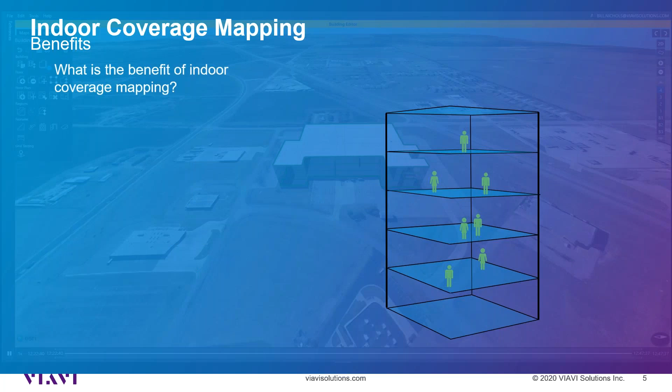So what are the benefits of indoor signal mapping? Today we've got many DAS or distributed antenna systems being installed. Indoor signal mapping can help with verification of coverage. In the old days, you basically would go to a particular point on a floor called a waypoint, stop and make a measurement with a spectrum analyzer, looking at the power level at the location, and maybe have a radio to do a subjective audio quality measurement.

This type of mapping took quite a while, and then when you were finished, you had to produce the results generally using an Excel spreadsheet. Processing this information took quite a bit of time. You're going to see today that you can quickly set up the map, quickly configure the maps, add floor plans to the building, and then do a walkthrough, all in a very short period of time.

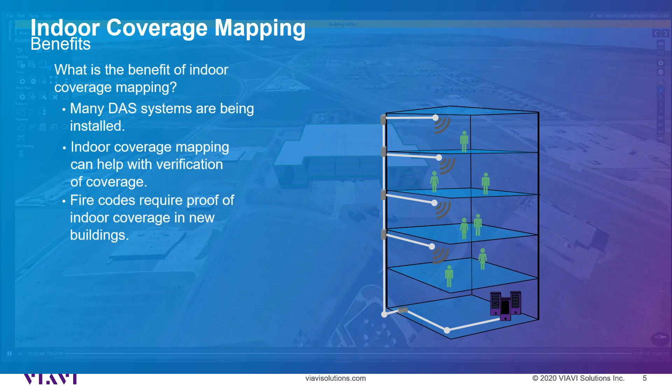The other driving forces behind indoor signal mapping today are fire codes. The fire codes today in the US require coverage in new buildings, and if you're working under the international fire code, that's new buildings and existing buildings.

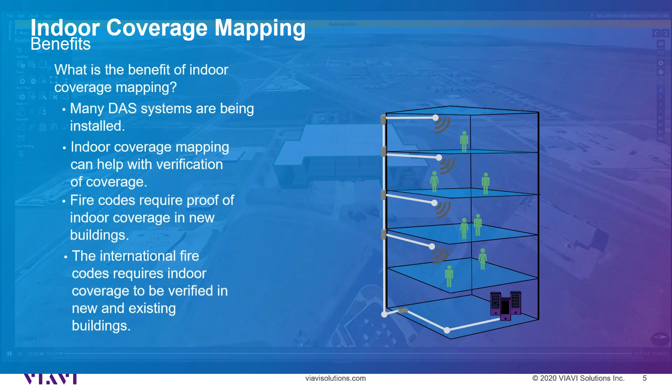Okay, so some of the benefits to the indoor signal mapping: it integrates the Neon capability to automatically collect geo-referenced test data with the 3550 or 8800 SX, and it saves valuable time and money.

By automatically calculating the indoor location and correlating with the radio signal data, it limits the need for manual check-ins. By removing data recording errors caused by incorrect location estimates in complex buildings through automatic indoor path determination, this is all built into the Neon signal tracker.

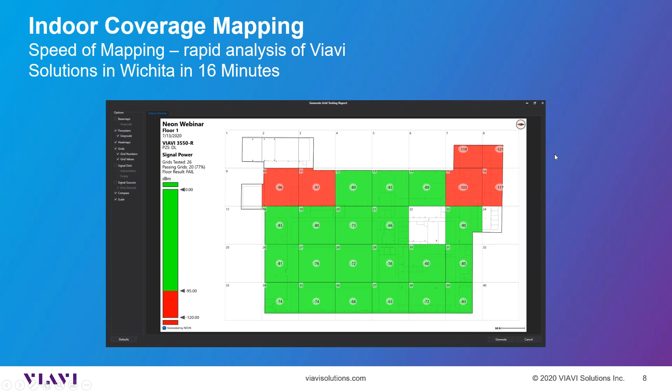This building is approximately 280,000 square feet on the floor here, and it took about 16 to 20 minutes to do this walkthrough. The device that you see here is the Neon signal tracker. This is worn on your belt.

You want to point it perfectly forward to get the best results, so it doesn't keep trying to get you going sideways. You get that straight forward, and you can get a real straight line on your points as you do the walkthrough. This device supports collection and processing of sensor data to deliver that 3D indoor location.

The Neon tracking unit includes the temperature compensated triaxial gyroscope. That's your X, Y, and Z axis so that you know which way you're going. It has a triaxial accelerometer to count your steps. Has a magnetic sensor so that it knows where the magnetic north is.

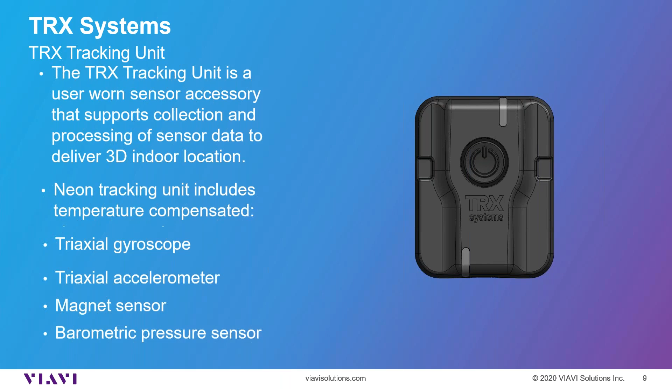The Neon Command application runs on the Windows computer. This allows you to create your building before you do your mapping. We're going to actually run through this process to show you how easy it is to set up. And then once you've walked the building, you can upload to the cloud, or you can save it locally on the Android and then port it over to your PC.

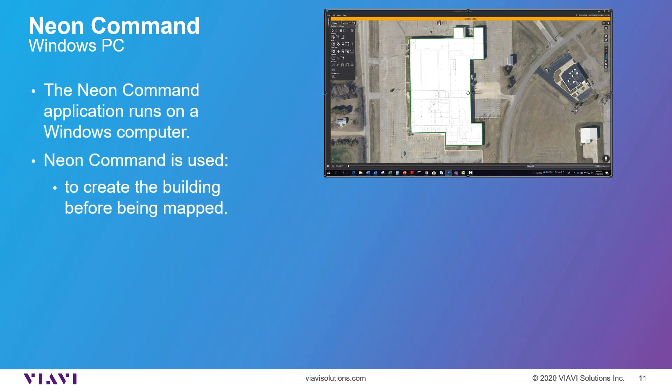So this is just a before and after. You're going to see this here in just a moment or two, setting up the map, and then this is just an example of the end results here. This is both on the Neon Command, which resides on your PC.

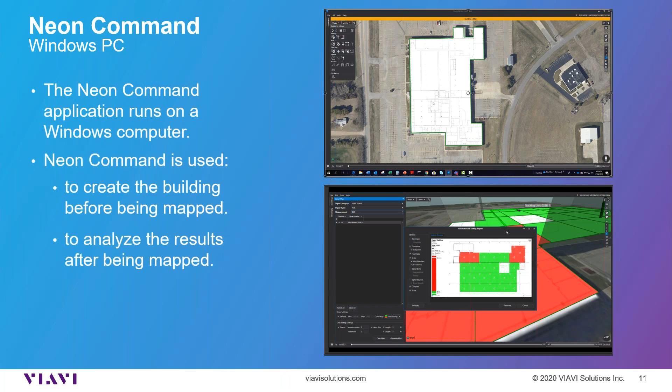Okay, so we're going to kind of go through the process here real quick. In real time, it probably took me about 15 minutes to do this. So it really doesn't take very much time at all. They have some really nice tools in here to expedite the process.

So to get started, the only thing you have to do is go up to the search icon and either type your address in, or if you have an address that you've already worked with and you want to maybe do another map of it, you can go down and select it from the list.

Now, once it's located your building, you're going to see it on your PC, and then you'll want to use your mouse. You can use your thumb wheel to kind of zoom in and out, and then you can also use the left click to grab it and move it around the screen so you can kind of center it up.

And once you've got it centered on the screen where you like it, you'll hit the file icon up at the top, or the drop down, and you'll select create building. And what that gives you the ability to do is draw an outline on your building. So you just start at a single point and you just walk around the building with your mouse and just make an outline of that building.

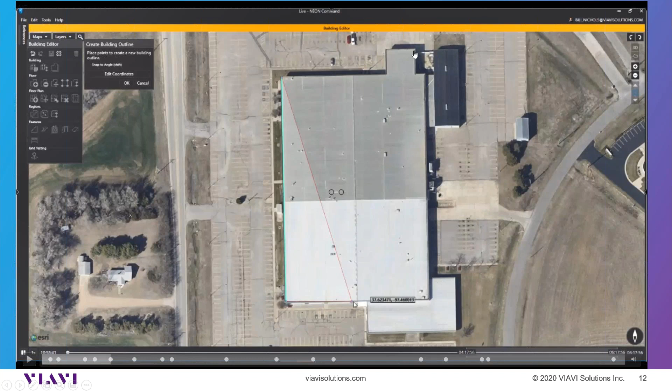Then once you've made the outline, it's going to pop up a window and give you the ability to name that building. And that's where you can start to add your floors. In this example, because I wanted to show you how this is done in the Neon command, I'm actually going to add 4 floors above and 3 floors below so I can show you some of the features in here.

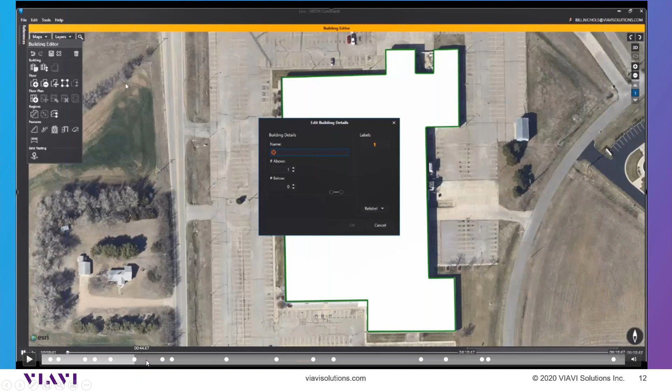Once you've done that, the only thing you have to do at that point is go over to your icons and select the floor plan to add the floor plan. And you'll locate that on your PC wherever it might be. They can be JPGs or PNGs or bitmaps. And you'll just open that up.

And it will somewhat self-center on the building, but you can see that I've got a little bit of work to do to get this lined up with my outline. And there's a real neat tool to do that too. You can edit this with points. So you go over to your icon and you select edit floor plan with control points, and it'll pop this window up here.

And basically you just set these pins. You have 5 locations, so you just set these pins at each location. So you go around and set 5 separate locations on the building as we move through here. And then once you've done that and you press OK, you're going to see that it's very close to that outline.

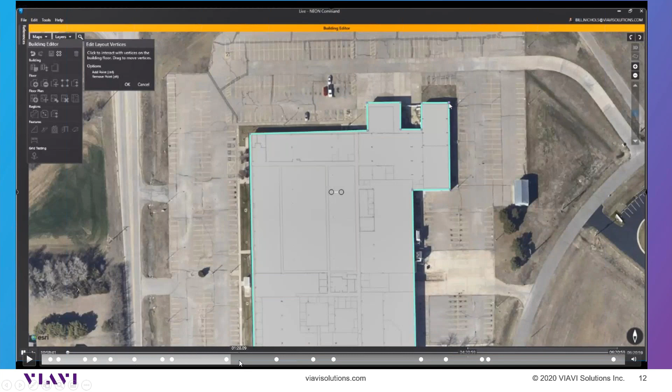And once you've done all that, it's going to ask you, do you want that as your outline for the rest of your floors? In a cookie cutter situation like we have here, that's fine. But it also has the ability, if you have a building that has a greater area on your upper floors, maybe some balconies, to add areas and subtract areas from your various floors. But in this particular application, we've got a nice cookie cutter type of building here.

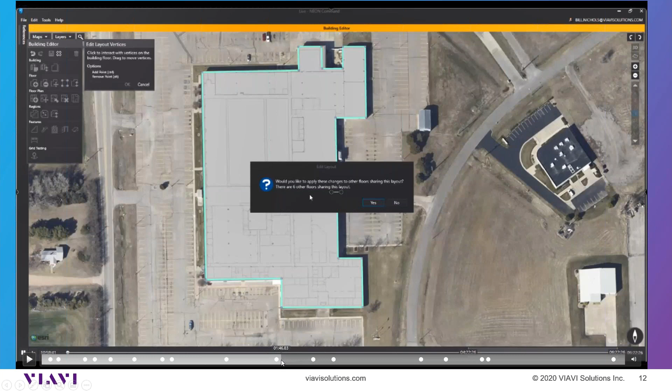Okay, so once you do that, you're just going to go through the process again, depending on however many floors you've got. You'll just go through and add those points, and it'll size that map into the outline of the building. So it goes very quickly this way.

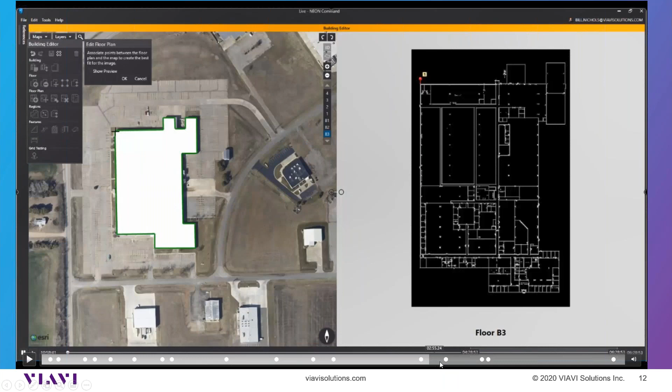Now, I'm getting to the last floor here. You don't have to use a white background if you don't want to, and you can also manipulate the colors in the grids or heat maps. You don't have to do grids either. You can do heat maps and various types of map representation. But on my last floor here, I decided to use a negative for that floor plan, and so again I'm using the edit points to put that in the building.

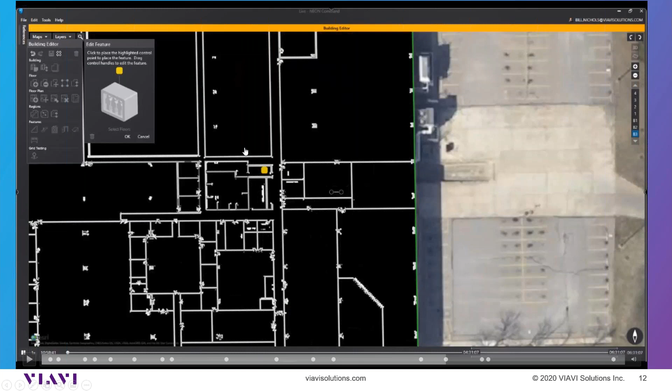And after you've done that, if you've got a tall building, you're going to have elevators, you're going to have stairwells. Like we said earlier, that's a difficult place to map. And so you can add stairwells, staircases, elevators, doorways, ramps. There's many things that you can put into the building. So you'll decide what you want to do and locate those elevators or stairwells.

And then when you're putting the elevators in, you'll tell it which floors you want those elevators to go to. In this example, I've got one elevator that's going from the first floor down into the basement levels, and I have another elevator that's going from the first floor up.

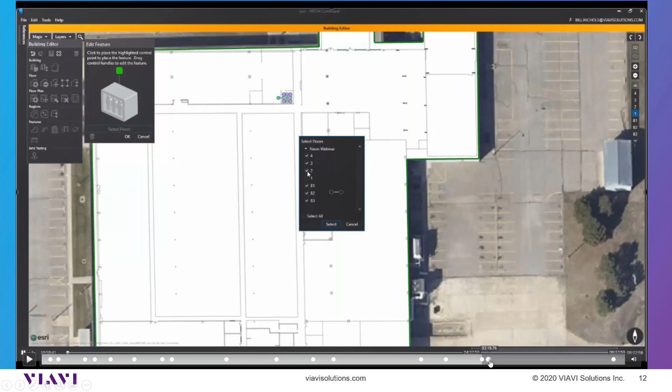Once you've done all that, you can go into three-dimensional mode here. Your legend on the right side will give you the ability to do that. Initially it'll say 3D up here, and you'll tap on that up here in the upper right. It'll put it into a 3D look on the map. And then you can actually go through and check each floor to make sure that they're symmetrical, and that's the way that you want them to look.

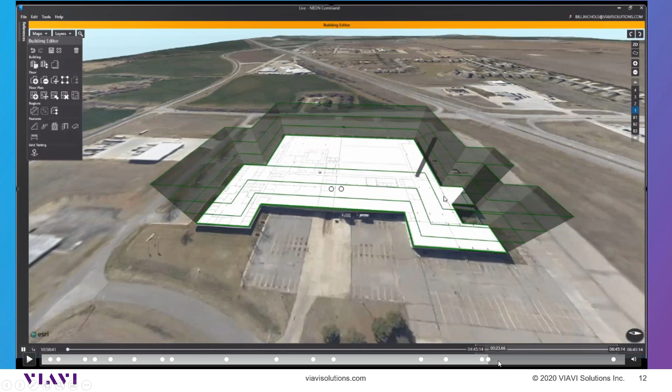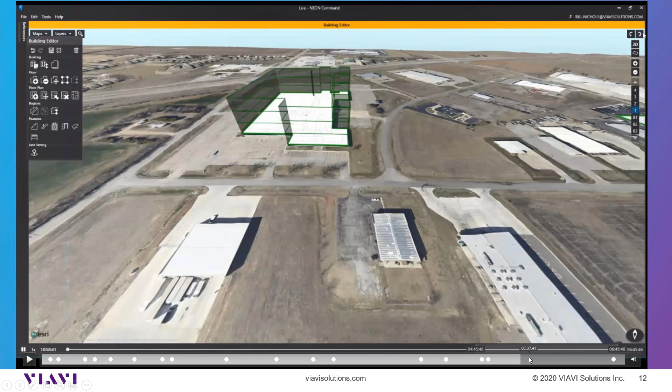And you can also do a 360 with the icons up here at the top. And again, you'll push and pull with your mouse to keep things centered up. But they've made this a really easy tool to use. So we're looking around. It looks like we like the way our building looks. And once you do that, you can go back into 2 dimensions and then go ahead and save your map.

Now, when it saves, if you are on the network and you want to do it this way, you'll hit save and it'll upload it to the cloud. And then you can just get on your Android on the Signal Mapper, and you can just download this map to your Neon Signal Mapper, so you can do your walkthrough.

Now, if you're government folks, a lot of times you are not able to use the cloud. So you certainly can store this on an SD card. And then once you get that on the SD card, then you can just load it into your Android, and you can do it that way. And there's no files on the network at that point.

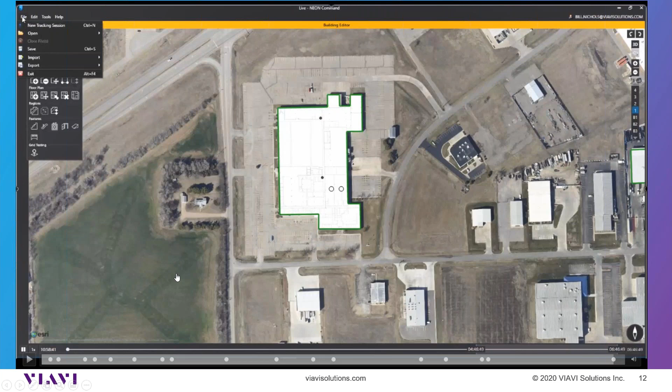Okay, we're going to talk a little bit about the Android device on here. So the Neon Signal Mapper application runs on the Android device, and you have to supply the tablet. The mapper is used to guide the user while collecting your signal data. So you'll see that floor plan the way that we've laid it out. You're going to actually see your location on that floor plan. You'll see the cursor walking through the building as you move through,

and you'll see the updates continuously on the map, so that you'll know whether you have good coverage or bad coverage, and whether you need to recalibrate your walk, which is real easy to do. We'll see that here in just a second. We'll talk about that a little bit further.

So this is basically your setup as you walk through. You'll have your 3550 connected to that TP link with the Ethernet. We're not showing the USB, but you do want to hook that USB up to power the TP link. And you'll be wearing the puck, if you will, on your belt. And then, of course, you'll be walking with your Android with the signal mapper on it as you walk through the building.

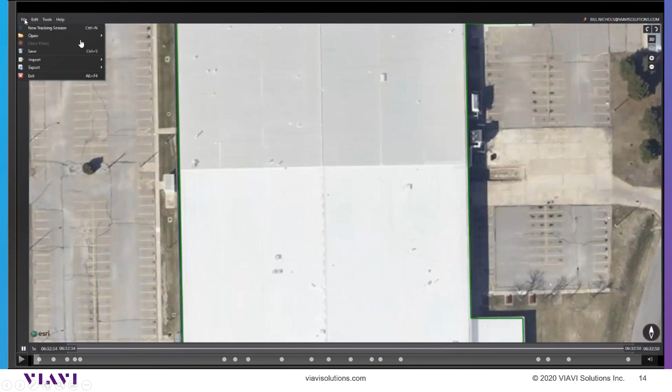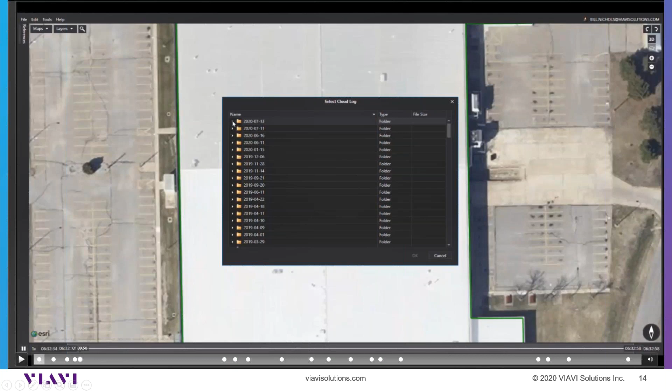And once you do that, you're either going to go to the cloud to open this. So you're going to hit open, and I did this through the cloud, so this is the way it's going to look here. It'll open up all the folders that you've got, in this case in the cloud, otherwise you'd load it off your PC. But this is the particular one I did. You open the folder and you'll find the file in there. And once you've clicked on that,

then you'll get this legend on the left side over here. I know that it's a little fuzzy to see the verbiage in here, but this is actually my map. And so the only thing you have to do at that point is decide, do you want the display showing you signal power, signal quality, BER, mod fidelity, and then once you've decided what you want to plot, there's a little check mark here by the DL, which means downlink.

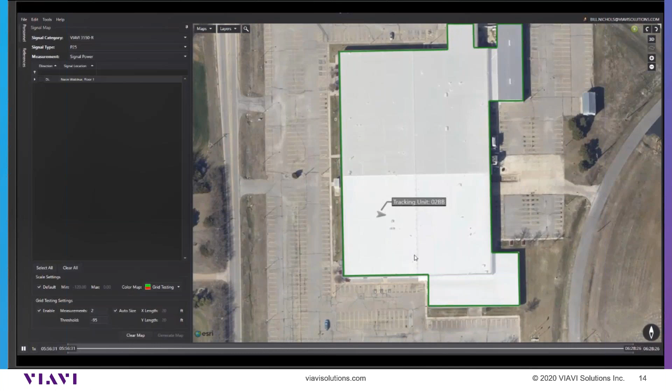And then once you've done that, you'll just hit generate map down here at the bottom, and it will populate your generated map from your Neon Signal Tracker into the display that we see here. So that's what it looks like. So this was the particular walk that I did.

Now, there's a lot of different things you can do once you get in here. There's actually a timeline on here, so you can move the timeline and you'll see your walkthrough, or you can go in reverse. You can also zoom in very close to take a closer look at things. And you can also make some adjustments if there's points in the path you want to straighten out so that you get a nice presentation for the customer. You can go in there and make some minimum adjustments to your path.

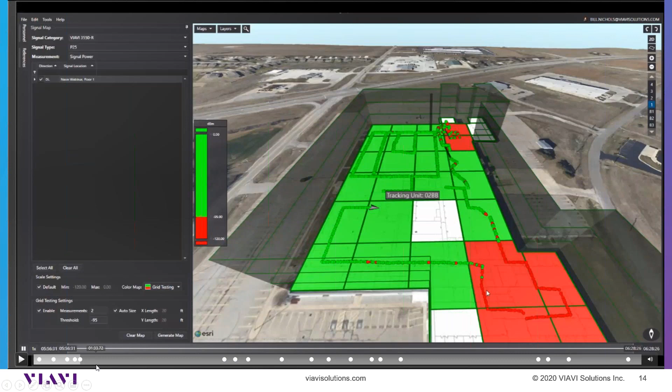So this is just showing the walkthrough here. And of course, I'm zoomed in pretty good. So any location where you're out of spec when you're doing the grid mapping, those grids are going to turn red. Now, if you were doing a heat map, then you would just see a heat generated signal around the path that you're walking. But for fire code, this is what they want to see of these indications in the grid.

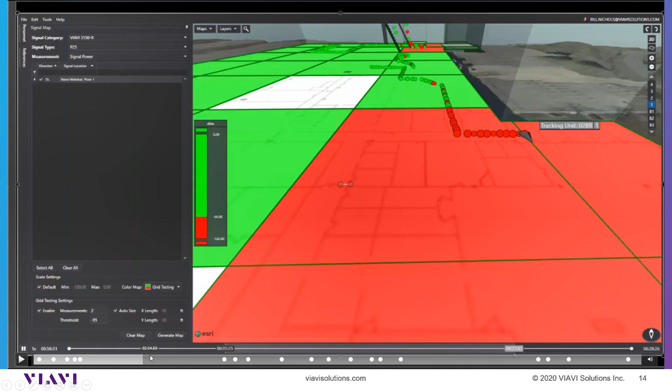And this is what a grid would look like. This particular one here is floor 1, and we're just showing signal power here. And remember, our fire code is -95, so we're a little bit out of spec over here, but out of spec is out of spec, so these grids will turn red. And in this indication here, like I said before, we've got 40 grids showing up on our screen, and I believe these are 80 by 80 squares.

So that's what a signal map would look like. And then inside of here, in this particular one, like I said, you're looking at power, and it's also telling you what grid numbers we have out here. And if a grid didn't get mapped, then there won't be any indication there, or it might be gray. I was on the catwalk on the 2nd floor here, and there was one grid that was gray. It wasn't good or bad or indifferent. There just wasn't enough information to color that grid.

And what you're looking for is areas where you have bad coverage, and you might need to put a BDA in. And we're going to see that we can go into any of these balloons here, if you will, and we can see the actual measurements at that point.

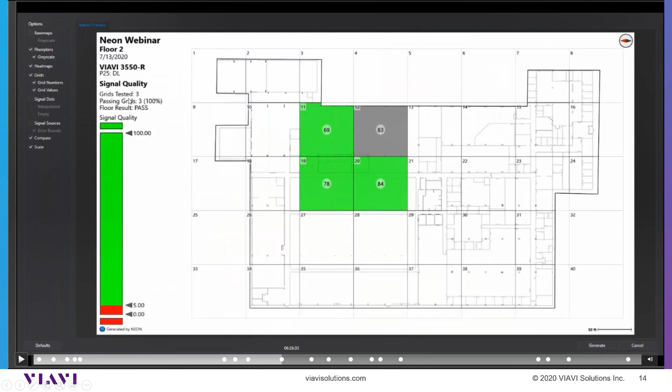And here's another grid with mod fidelity, and we're going to explain what mod fidelity is towards the end of our discussion. But the P25 standard is mod fidelity has to be less than 5%. Again, I'm going to explain what that is in a little bit. But you can see that we had a really good modulation fidelity in all of our grids down here, and even in our 2 grids that were below -95, we still had that, which is out of spec, but is still indicating that we had good audio quality.

And then over here, we're gonna zoom in on this area a little bit and see what actual signal levels we do have out here. And they were below -100 up in this area, so we do see that our mod fidelity is definitely getting a lot higher out here.

Now, here is the transmit BER. This is another one of our measurements that we make here. When you have a good signal strength and good audio quality, that bit error is going to be 0. If the bit error starts to go up, then you know that your audio quality is probably going to be impaired. Once you get above 50 or 60, you're going to start getting dropouts.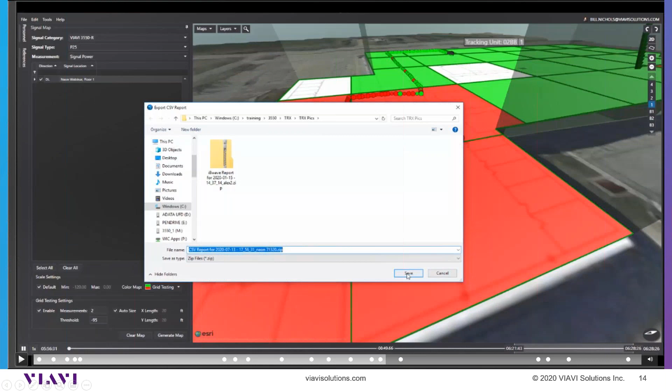Now, you don't only get the grids. You can have all the data information too, if you need to put your information into an iBwave report, or you just want the raw CSV data. Let's see if I can pull that up so you can see it. There we go. So when you do an export, all those grids that you saw, I was hitting export and going to grid report, and then telling it what type of grid I wanted, whether it was signal power, mod fidelity, or whatever.

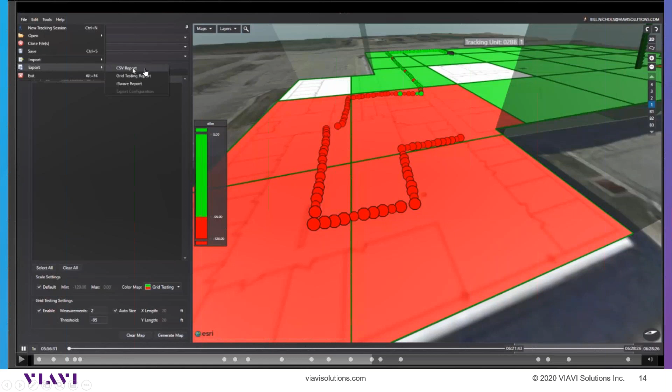But you can also export the CSV reports for Excel. That's all the raw data. And it'll also export as an iBwave report. So if you're working with iBwave, you can certainly incorporate these files into iBwave.

So this is getting the bird's eye view. Of course we saw these grids, but now we're getting a bird's eye view of what's going on. So we definitely need to do something in this corner over here, and we need to get a BDA in these two red locations, at least on this particular floor. Of course, you're going to have to do this on all the floors, but our example here is the first floor.

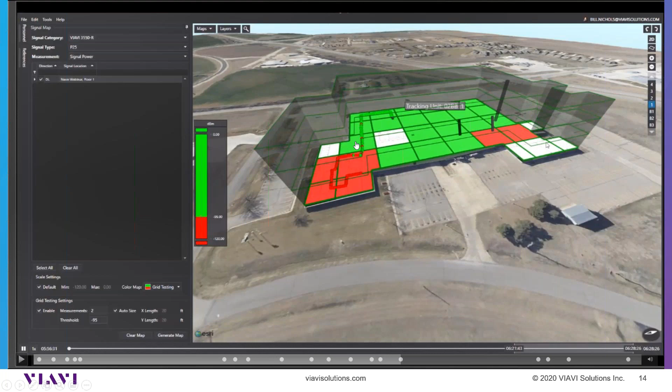Now, the other thing that you can do with these maps on these bubble points here is you can just click on any bubble point, and it's going to tell you what the particular measurement was at that location. And at this one that I picked here, you see the mouse there. It's on the red one, but I clicked on the green one just to the left of that. So that's what we're seeing here.

So it's telling us this is the downlink. Our signal power at that point's -90. Our mod fidelity is 2%, real good. BER is 0. So the signal quality is 78%. So that's good. And it's also reporting what the NAC code is. If you're mapping public safety, you're probably going to be doing a trunking system, and there's going to be a network access code associated with that control channel, and you'll see that in your measurement too, at least in the grid window here.

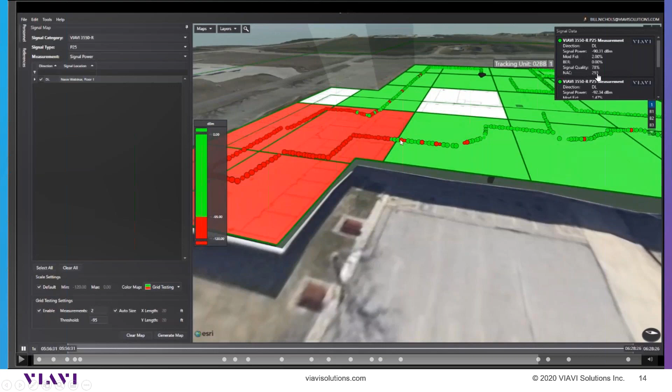Now here we're getting into our area where it looks like we're going to have to do some work. We're going to have to get a BDA in here to amplify that signal into that area. And on our information up here, we're reading about -118 right now, and the mod fidelity is 41%, and BER is 100%. So at this particular bubble right here, I would have an audio cutout. Now, as I'm walking through here, that level's pretty low, but you would hear audio kind of coming and going at that point.

And one of the things that I did when I got into this area, and as a matter of fact, I was right here, I wanted to see what it would sound like on a public safety radio. This is an example of a public safety signal. It's a P25 signal that I used. I was at 851.0625, and I was using one of our service monitors, our 3920, to transmit a speech pattern because I wanted to hear what that audio quality was.

And so at this point, when my 3550 and my Neon signal tracker was telling me that my level was -118 and I had 100% BER, I opened that radio receiver up, and I was still getting good audio quality at that point. Now, I was also stationary, and as you move, that's going to make a difference, but I was getting good audio quality at that point.

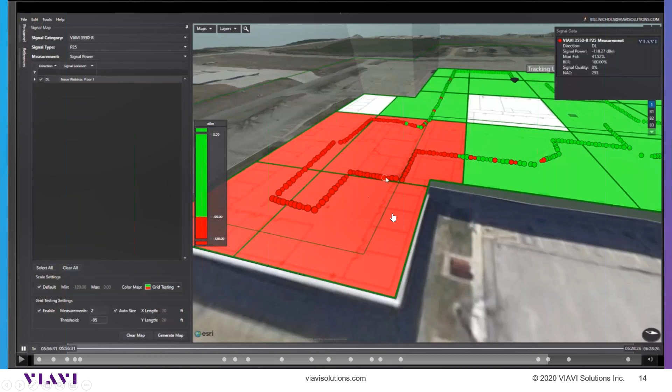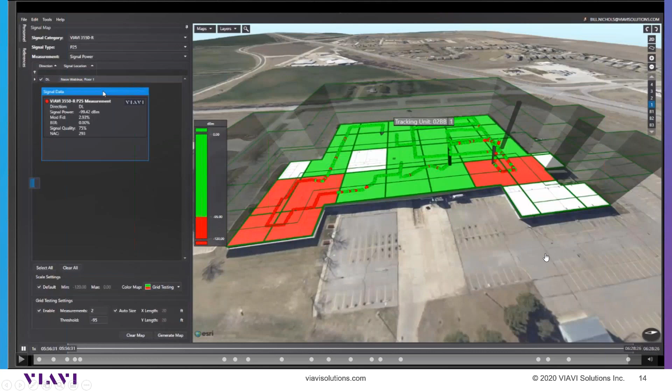Now, we wanted to talk just a little bit more about what mod fidelity is. A lot of you guys that have been doing public safety know what this is, but some people may be new to this. So modulation fidelity is a measure of the jitter on the 4-level FSK, and I'm going to show you what that looks like here in a minute.

And again, talking about these measurements, these 2 bubble points right here, I was at right here, -111.18 is what it was telling me at that particular bubble point. Mod fidelity was 23%, BER was 5%. The signal quality was 11%, but I would still be able to pick up the audio because like I said, I could hear it at that point, even on another service monitor.

Now you take one step, and now it's gone down to -116. I have a BER of 100%. That would count as a cutout on the audio. You would actually hear the audio cut out, and so it's going to be spotty coverage, but we're well below our fire code here at -95. So we know that we've got some work we need to do in here.

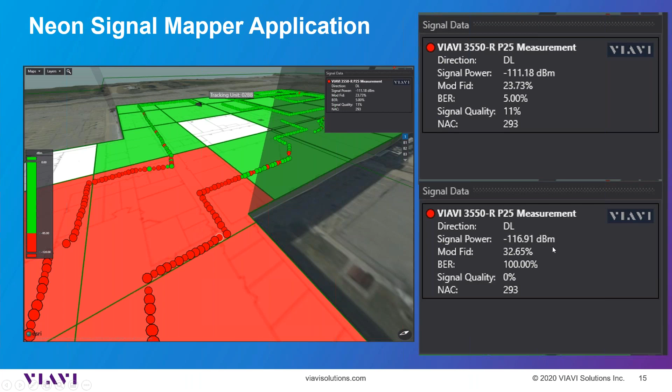I just wanted to kind of clarify, or try to correlate a little bit these numbers as opposed to what you might hear if it was an actual conversation going on. Now, this mod fidelity, just to give you a little bit more information about this. In P25, it's called modulation fidelity, but if you're doing NXDN or MOTOTRBO, it's called FSK error. There's no difference in the measurements. They just use two different terms.

The P25 is from the APCO standard, and DMR is written off a European standard, the ETSI standard. But it is a measurement of the quality of the digitally transmitted signal, and the signal can have a phase jitter or instability causing reception issues, and that's what we're measuring here. It's RMS deviation error, if you want the real term for it.

In P25, how this works, you have four signals. Basically, you've got the carrier shifting to these four signals. It's either plus or minus 0.6 kilohertz or plus or minus 1.8 kHz. And if you're in DMR and NXDN, these frequencies are different, but they're giving you the same information. It's a representation of a dibit, one of 4 dibits, and the P25, NXDN, and DMR all use this 4-level FSK, if you will.

And if you're on the 3550 or an 8800, you could actually see the 4 signals displayed. So that's a little bit about mod fidelity, what that term means.